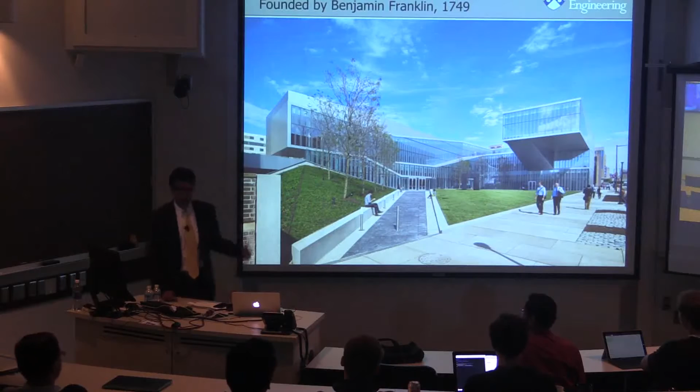Before I get started, I became the dean roughly 3 months ago, and according to the new dean, everybody should have this first slide on their presentation. So this is a picture of our new nanotech building, and I thought I would present this to give you some sense of the composition of Penn Engineering. It's the first engineering school established in the first university, due to Ben Franklin in 1749. Our faculty is roughly 116, about 14 practice professors, research professors, and full-time lecturers. The computer science department is about 30 faculty, roughly the same size as UNC. The great thing is we're planning to grow by about 33% in the next 5 years, so for those of you looking for academic positions, it's a great place to apply.

It's right in the middle of the city, a very rich and vibrant campus, and I'd love to tell you more if you're interested. But what I'm really here for is not to sell Penn, but instead talk about my own work, which is on aerial robot swarms.

I thought I would start by showing you a picture of our aerial robots. And I hope nobody here is from the FAA. If you are, I'll tell you that this picture was shot in South America. If not, this is the Penn campus, and this is the other side of the Penn campus. I'll tell you a little bit about our work.

But first, I want to give you a quick overview of the industry associated with aerial robots or UAVs, and then tell you about how we think about controlling these UAVs. It's a model-based approach, and I want to tell you about this because not only do we design software, but also the electromechanical system that comprises the platform. Then I'll tell you about one of the big challenges in designing good systems at this level: state estimation, the problem of determining the position and velocity of the UAV. Then cooperative control, how we get multiple vehicles to collaborate, and then some of the applications we're trying to address, spending roughly 10 minutes on each idea.

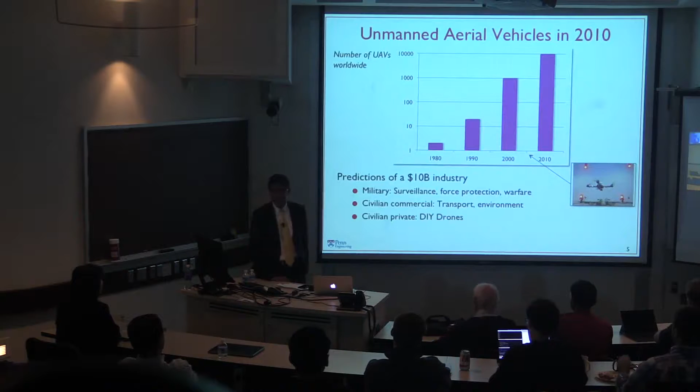At that time, there were predictions of a $10 billion industry with lots of interesting military and civilian applications, primarily driven by the DIY Drones organization. If you go to DIYdrones.com, started by Chris Anderson, who was then with Wired magazine, it attracted about 1 million or so developers by 2010.

And the FAA boldly predicted that this industry is going to take off — we're going to have 15,000 civilian drones by 2020. By the way, we started working with these quadrotor geometries back in 2006, long before they became popular. But before that, much of this work was really in fixed-wing aircraft. So this is in 2010.

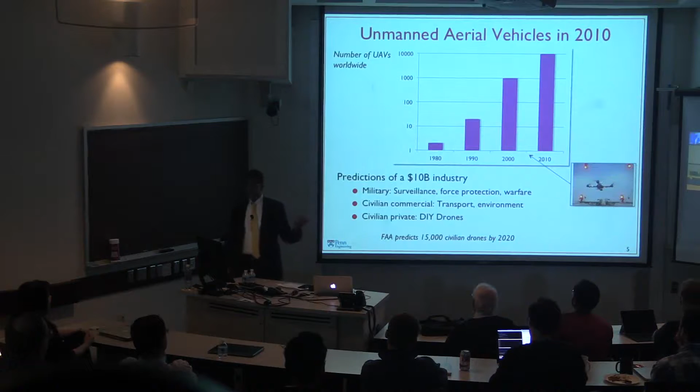Fast forward to 2015, and things have really gone crazy. There's a lot of popular press about this, everybody is talking about drones. They said 15,000 by 2020 — well, 15,000 drones are sold just in the US every month. And this Christmas they expect to ship 1 million drones worldwide in December alone. So this has really become a huge industry.

And now it's a $15 billion industry. They say it's going to grow to $25 billion by 2020, and you know that prediction is also going to be off. But what's impressive now is the broad range of industries being impacted: agriculture, inspection, patrol, security, photography, virtual tourism, movies.

Things are exploding, as you can see. And it's not just these multi-rotor aircraft. If you look at unmanned vehicles broadly, we call these aerial robots, and the industry calls them drones, but it also includes military vehicles — in the Army, they call them remotely piloted vehicles, RPVs. But they're all part of the same family.

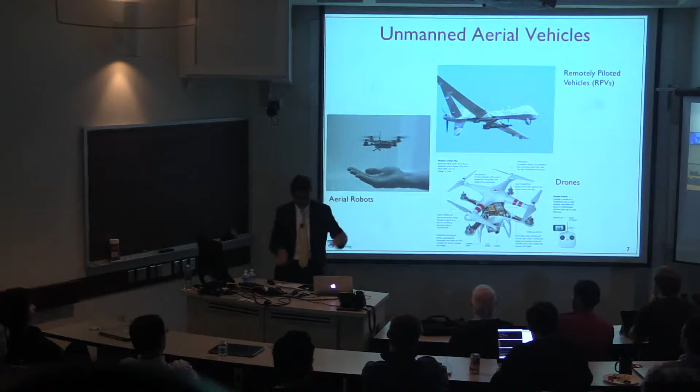There's a lot of growth in small vehicles, research platforms, commercial vehicles, and also much larger vehicles. I like to joke that if you look at the evolution of these platforms, we're actually just starting off — there's a long way to go, and a lot of interesting stuff going on.

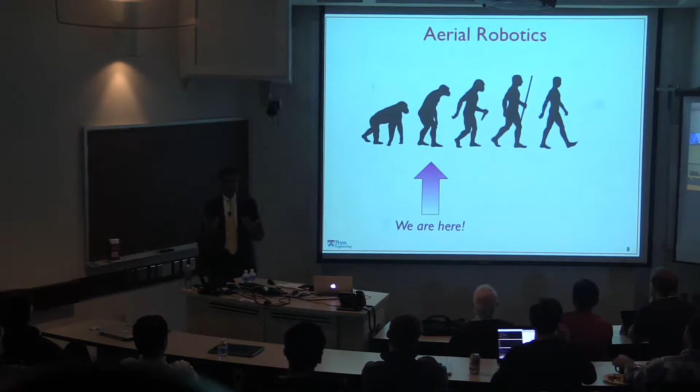So you can ask, why did all of this really take off? And of course, it goes all back to Moore's law. It started with the semiconductor industry, the price-performance ratio of things connected with computing falling. Today people will tell you that Moore's law is actually coming to an end — this is 'Moore's curse,' people argue the Moore's party is over and things are slowing down. But I think there's an after party.

This after party has to do with continuing trends. Computing costs going down roughly 30% a year, same with storage, same with communication. So if you can compute quickly, you can store data, and you can communicate. There's one other thing I don't have here, which is the sensor story — the price hasn't decreased 30% a year, but it's getting there. With cameras certainly it's gotten there, and more. But with the sensors we need for aerial vehicles, it's probably not at the same rate. Still, it's dropping dramatically. So that's one side of the story.

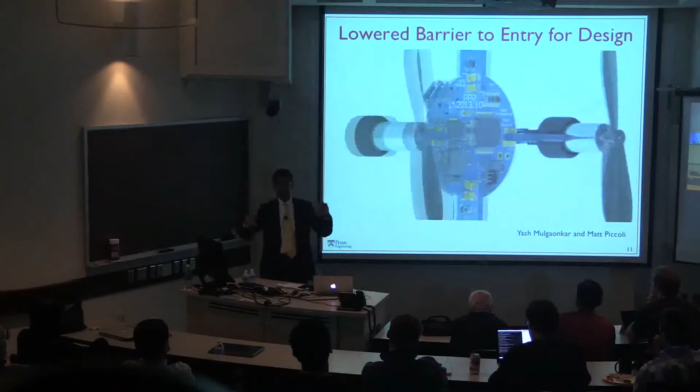I think the second side of the story is that the entry barrier is dropping. For instance, today my students are able to do electromechanical design in a matter of a couple of hours. They come up with modular designs of where to put microcontrollers, how to do power management, how to do processors, where to put the sensors — these smartphone-like designs. I call it a smartphone because it's roughly the same aspect ratio, roughly the same weight.

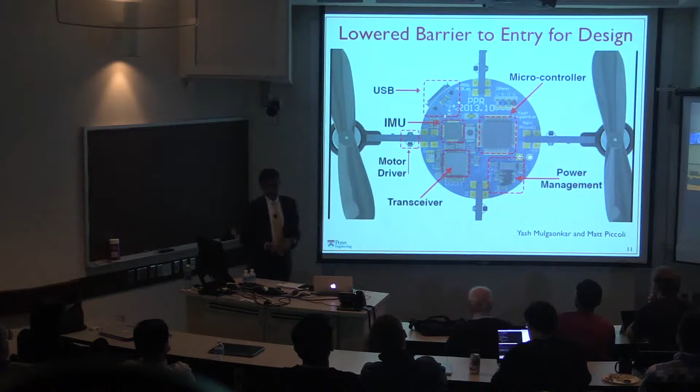You can put these together relatively quickly, and if you have a fab shop, you can manufacture them the same way you would manufacture smartphones today. So the barrier to entry to this field is dropping dramatically.

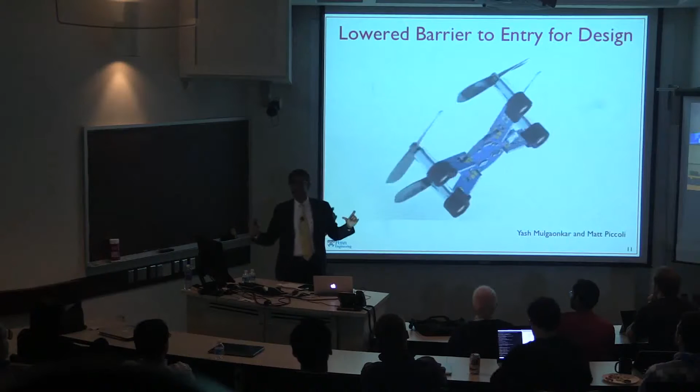And only last Friday, the FAA came up with rules saying that now anybody who owns drones will have to register them. We have literally hundreds of these in our lab, and I'm just trying to think of how we're going to line up to register these with the FAA. It makes no sense, but the point is that the barrier to make these is dropping dramatically. It's not like you have to buy them.

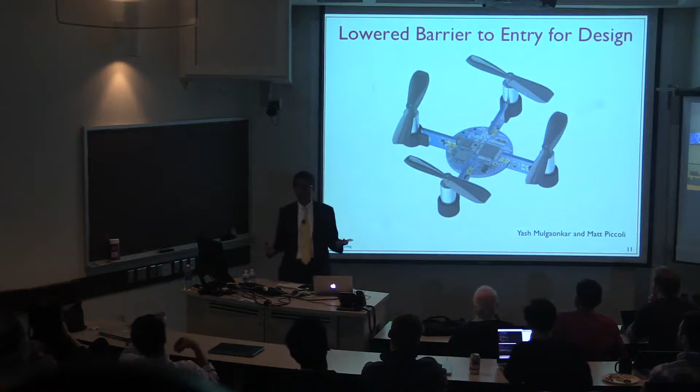So that's the UAV industry. What I'd like to tell you a little bit about is not how we build these, but instead the software that sits on top of these platforms, which is where the value added really is.

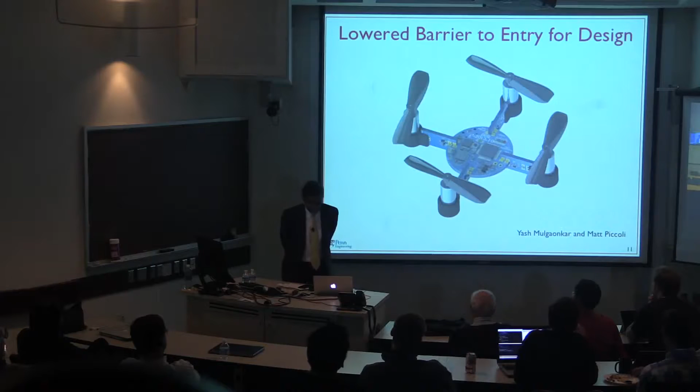Let me tell you a little bit about why it's hard to control these if you want to do aggressive maneuvering, high precision maneuvering, and then how we solve this problem. Most of our approaches are based on models, and then a little bit of learning that wraps around the models to account for uncertainty.

At a very basic level, you're trying to control a 4-rotor platform, and you want to control position and orientation, which means you're looking at the 3 variables that describe spatial position and the 3 variables that describe orientation. You can use quaternions, but in fact we use rotation matrices. Essentially, you're controlling 6 things.

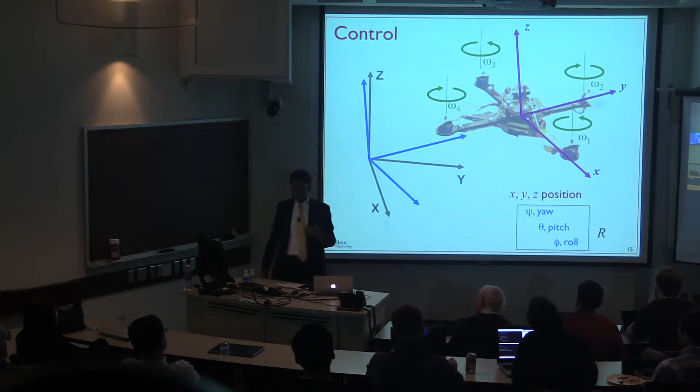And the big challenge is you only have 4 inputs. So the system fundamentally is underactuated. That's really our first challenge.

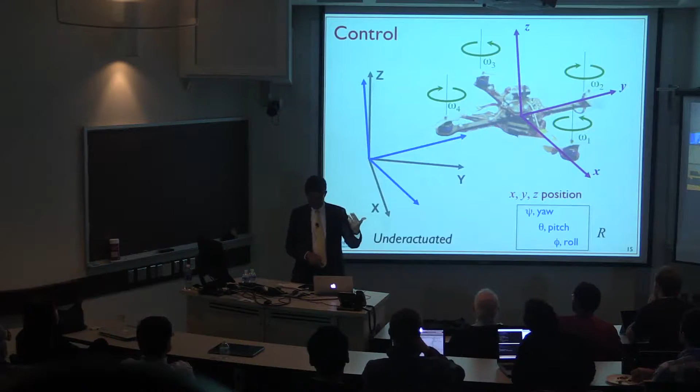But fortunately, there are some attractive properties to the geometry and to the dynamics. This property is called differential flatness. Because of this, while you might want to control these 12 state variables - 6 positions and orientations and their derivatives - which sit on a manifold that's curved and ugly, it turns out that because of the properties of the system, you can actually describe it on a simpler submanifold, which is just the position and the yaw angle.

And this manifold is actually almost flat. It's flat if you consider the Euclidean space XYZ. If you take the yaw angle and pretend that it's not 360 degrees, but instead goes from 0 to 359.9, then you can flatten it out, and that's this flat space.

So it turns out that every trajectory you can think of that sits on this complicated manifold and satisfies the laws of dynamics can be modeled by a sufficiently smooth trajectory on the left-hand side, which means the problem of planning dynamically feasible trajectories reduces to a problem of computational geometry. Find something that's sufficiently smooth, and you're guaranteed you should be able to follow it. So that's one simplification.

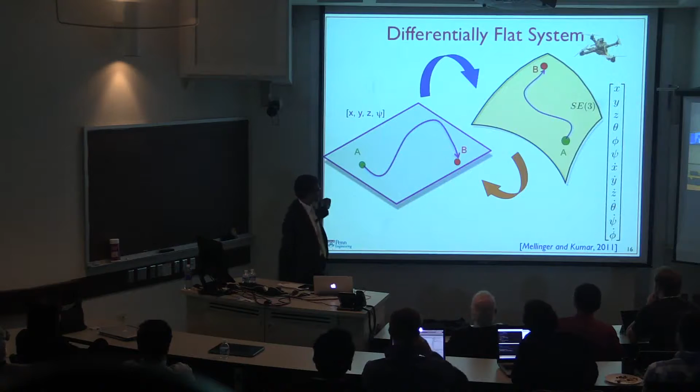So if I want to go from A to B in this more complex space, all I have to do is find the corresponding points on the left side and then plan the smooth trajectory on the left side. Our planning problem really is to find time-parameterized trajectories in position, Cartesian product with the yaw angle, which is SO2. Once you have that, we can think about control.

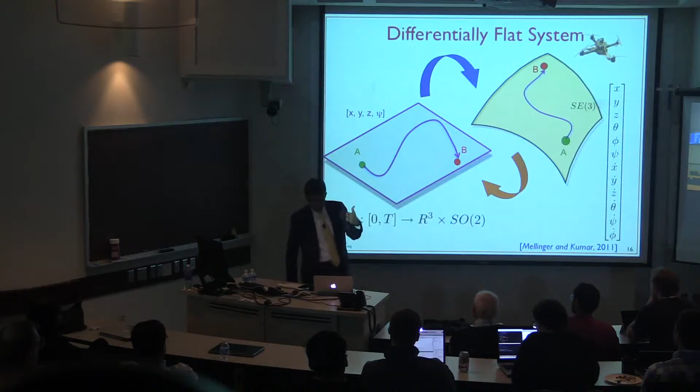So you do the next best thing: you project t along the direction in which you can apply the forces. That's just a dot product, right? So it's going to get me roughly what I want, but not quite, because the two vectors are not aligned. What's the next thing I can do?

Well, I can rotate the platform so that the vector k points along t, which means I have to essentially roll or pitch the vehicle so that those two vectors become aligned. And that's the second piece.

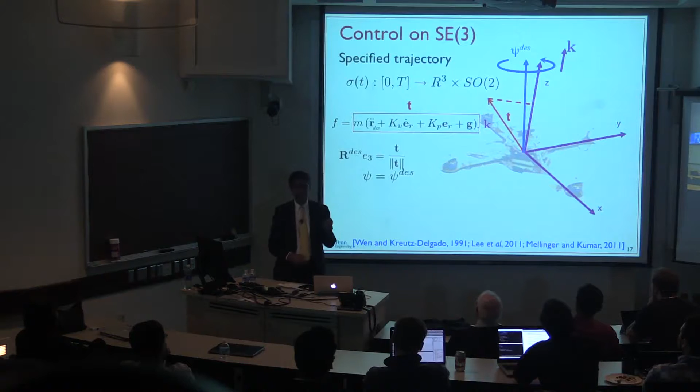We figured out what that orientation is, so we calculate the desired rotation, r desired, and then we calculate the error in rotation space. This is a little complicated. You have two rotations—how do you find the error between those two rotations? You have to do the computation correctly on SO3.

But if you can do that, the rest is just proportional plus derivative control on SO3. The only thing that complicates this is all the nonlinearities. If you know how to handle that, and if you're a control theorist, this is all pretty standard—and we know how to do that. That gives you the total force and total moment you want to apply, which translates directly into the rotor speeds. So all of this happens at 100 to 200 times a second on board the vehicle, and that's the essence of control.

The other thing we do, besides writing down these equations and implementing this in software, is get an understanding of what these terms are. You'll notice one of the things that shows up here is I—the inertia tensor, how heavy the system is and how distributed the mass is. The more the distribution, the bigger the rotary inertia, and that comes into play in these equations.

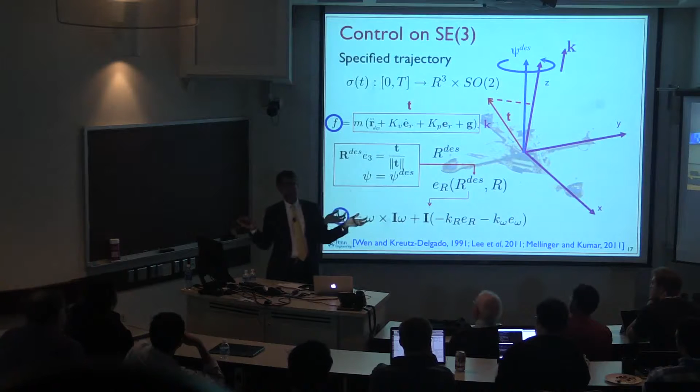It turns out that your ability to quickly stabilize degrades with the inertia—the bigger the inertia, the harder it is to stabilize the system. This motivated us to build smaller vehicles. This is work by Yash Mulgaonkar. This is an 11 centimeter vehicle.

From micro aerial vehicles, we've gone to nano, and now we're down to pico. This consumes about 6.5 watts, max speed of 6 meters per second, which is about 3 times brisk walking speed. But 6 meters a second normalized to 11 centimeters, in terms of body lengths per second, that's pretty fast—like a 747 going at Mach 50 or something. So this thing could really zip for its size.

Again, the small size has added advantages—it becomes safer. You can stick your finger in the blades and nothing happens to your fingers, which is important. When we first started working on this, one of the first things we had to order was a first aid kit. Now if I plot this histogram of Band-Aids consumed over the years, it's kind of tailed off with this guy.

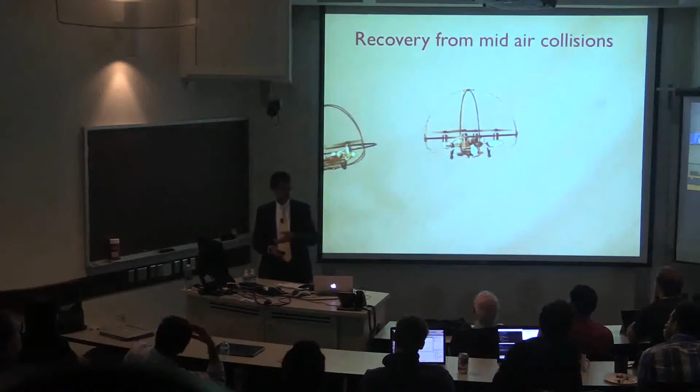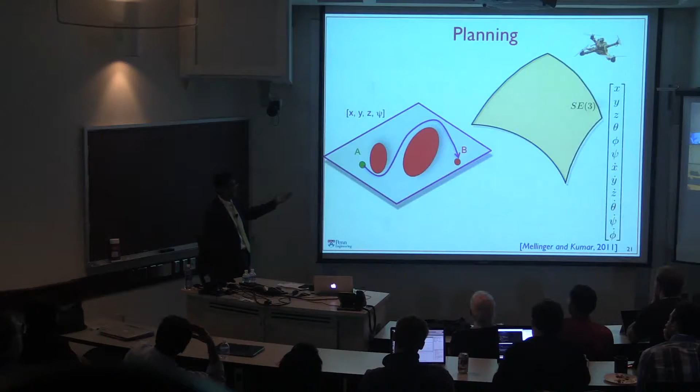Coming back to planning motions, as I told you before, we think about planning in the space around obstacles. Someday we hope not to worry about the obstacles, but right now we do because our vehicles are a little bigger. We plan these smooth trajectories, designed to minimize the fourth derivative of position, so we call them minimum snap trajectories.

Again, this is a computational geometry problem. If you know what the obstacles are, you can plan your trajectories around them, and those trajectories get automatically mapped to this more complex space. I told you the control story, but this is the net amount of real-time software that has to run for control and planning on board. Of course, I have to know where these obstacles are, and that comes later, but the control and planning is essentially this.

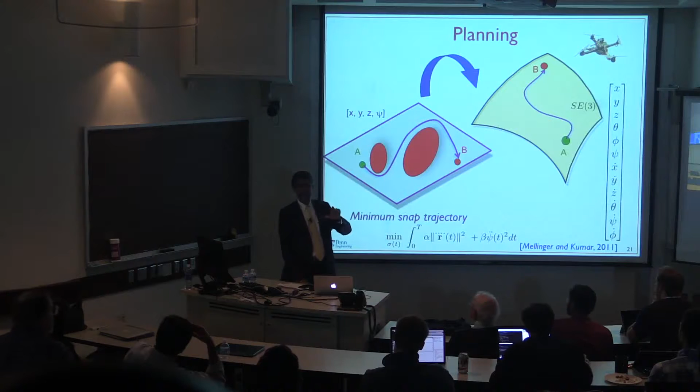One of the things I want to emphasize is that we can't really decouple the mechanical design from the electrical design from the controls design. As you'll see from this video, this is Daniel Mellinger's work, and this is Yash Mulgaonkar's work. Bigger robot, smaller robot, same degree of robustness.

One of the things we can show you is that if you look at the basin of attraction, roughly speaking the envelope of conditions from which you can disturb the robot and have it recover safely, that basin of attraction grows inversely with L, actually L to the power 5/2. So the smaller you make L, the bigger that basin of attraction, and the more violently you can disturb it. This is sort of paradoxical, because you think about flying and say, well, I want to be in the biggest aircraft possible. Actually, the smaller aircraft are more robust if you think about recovering from really large perturbations.

So that's one of the reasons we think about co-designing the mechanical platform and the control system design. If you take systems like this — and by the way, all of this is being done indoors in a motion capture camera environment where we get position feedback at 100 to 200 hertz — then the only real challenge is designing software for control and planning.

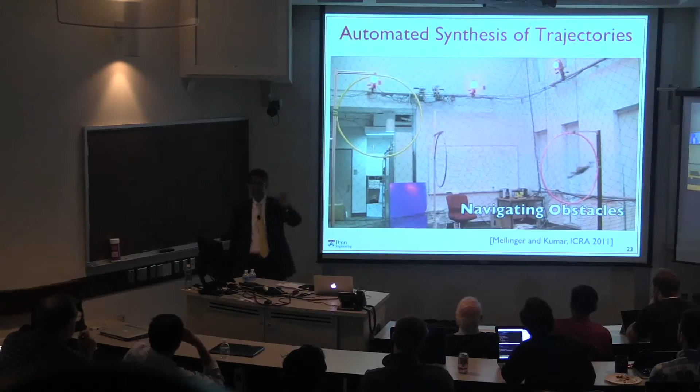And these are some of our minimum snap trajectories. If you know the environment and place these obstacles, and the robot knows what the obstacles are, it can generate trajectories like this in a fraction of a second. And it doesn't matter if the obstacles are moving — as long as it knows where the obstacles are, it can calculate these trajectories.

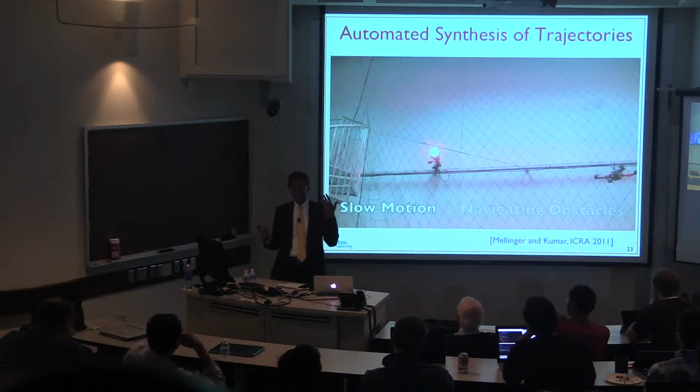So here again, the computation takes about roughly 1/40th of a second, and the vehicle sees the hoop, maybe 2 snapshots, extrapolates it as a function of time based on its knowledge of Newton's laws, and it's able to execute that. So in all of this, the only unknown thing is really the dynamics due to wind effects and near-ground effects, and those you have to learn over time. So we run a simple filter whose parameters we estimate over time.

And there are a few other things you have to do for maneuvers like this, which I'll tell you in a minute. This is Justin Thomas's work and Koushil Sreenath, who's at Carnegie Mellon. Birds are able to coordinate flight with manipulation, and this is our attempt to do the same thing. This is a Philadelphia cheesesteak.

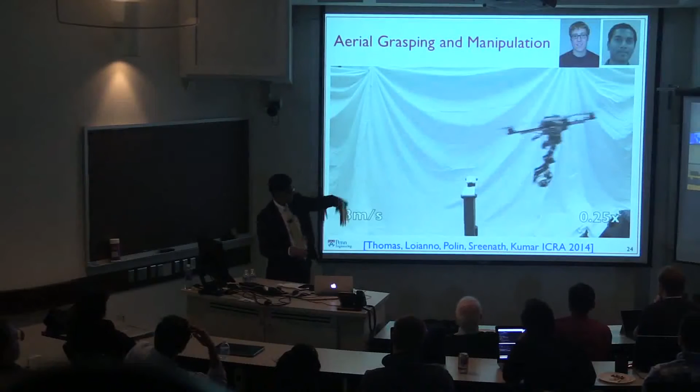You could see — by the way, it's the same framework — but the challenge here is as the vehicle swings its arm back, because of angular momentum constraints, the vehicle actually pitches forward the other way. So that has to be planned. Again, there's a combination of model-based methods, but then some iterative learning, which allows you to essentially determine the correct parameters. The first time we tried this, of course, it didn't work. But in 4 or 5 tries, you essentially get everything correct, and that's where the learning comes in. But there's a strong model-based component.

And the same model-based component — this is Sarah Tang's work — you'll see her trying to determine the exact trajectory that's required to carry this payload through a window that's a little shorter than the height of the payload. Again, if you have a model, you can essentially fine-tune a few parameters to do this, and the learning again is based on a known structure.

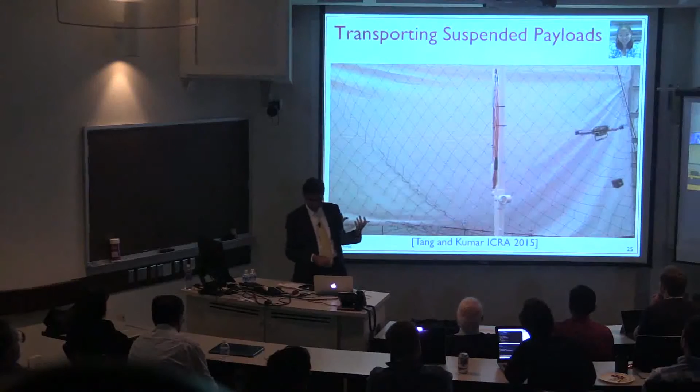Releasing itself from the perched position is actually harder. I don't have that experiment here, but it's something we've learned how to do, because when you release, it releases unevenly, and you have to recover from a bad set of initial conditions. This is something we've been working on with his group, to allow vehicles to perch on different types of surfaces.

So this gives you some idea of our approach to planning and control. What I want to do next is talk a little bit about state estimation.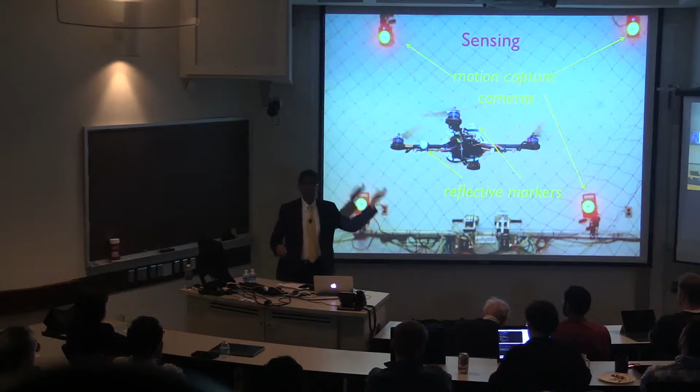So this is great for doing everything I've shown you, but if you go into buildings like this, you have to do this on board. Nobody's going to set up a camera system for you, and in fact in this building you can't even get Wi-Fi to work. So this is a big problem.

So we've built a whole set of vehicles. This is maybe a 4th prototype, a 2014 prototype, which essentially tries to do this on board. The solution is to put cameras on board - you'll see a stereo pair, a GPS receiver for when GPS is available, a downward-facing camera which you can't see, a pressure altimeter for measuring height, and of course an IMU.

So with vehicles like this, you essentially try to use some variant of what is known in the robotics community as SLAM - simultaneous localization and mapping, or structure from motion, for those of you in the computer vision community.

I know you're probably all aware of this, but let me give you a very quick overview. The fundamental idea is you have a robot that doesn't know where it is. There's a whole bunch of features waiting to be detected. If it's a range sensor, it's probably reflections from features in the environment like doors, pillars, walls, etc. If you have a camera, it's probably features you detect in terms of changes in intensity, corners, and so on. Depending on where you are, you see a subset of these features, possibly overlapping, could be disjoint.

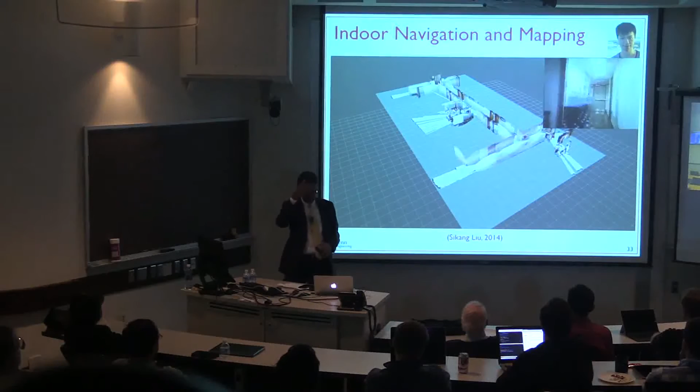To show you the kinds of maps we can build, here's an example from Sikang Liu's work, showing how we use onboard sensors to build maps indoors using a combination of laser scanners and Kinect RGBD cameras. This is our lab, entering on the bottom. You can see the clutter here, must be our lab.

These are 5 centimeter resolution maps, and you can see the trajectories it estimates. All of this can be presented to someone who isn't there, and that person can click their way through this complicated scene. This particular trajectory was pre-programmed, but you could imagine doing this interactively. This is the indoor situation, where we use sensors capable of dense mapping, like RGBD sensors, in real time onboard the robot.

Outdoors, things become a little more complicated. I want to show you Shaojie Shen's work, combining indoor and outdoor navigation. Again, the same idea: the user clicks on points and the robot moves. What you see here is a combination of lasers, and this is the error ellipsoid calculated using the UKF. It's scaled up by a factor of 100, and the color tells you which sensor is being used - for example, yellow means GPS and vision.

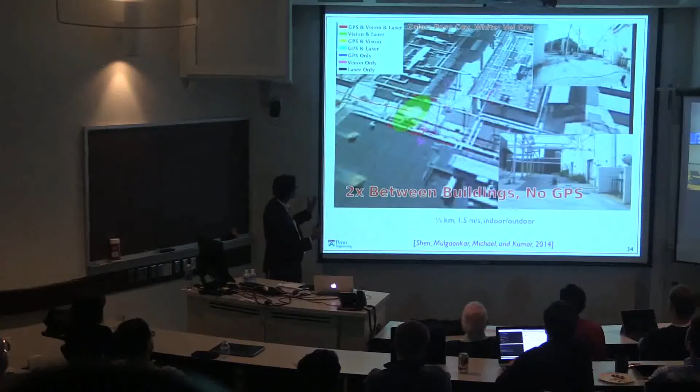When it goes through the trees, there's no GPS, only vision and laser work. Between buildings, GPS clearly doesn't work because you're too close to the walls. In a minute you'll see it go indoors where it's dark, and only the laser works. Of course, in all of these, the altimeter and IMU work. The key contribution is that we're able to integrate information from these different sensors and operate in a variety of settings.

The couple of things we still don't know how to deal with: one is smoke, and the other is being surrounded by a glass cage - I'd argue even birds have a hard time flying near glass buildings and windows. Those are two things that are currently hard to handle with this sensor suite.

Think about the challenges Amazon faces with package delivery. Going from point A to point B in the sky at 400 feet isn't challenging. The minute you come close to man-made features like buildings, or close to trees, bad things start happening. You can't have a map for everything unless you cut down all the trees and prevent humans or cars from entering an area. And even then, near buildings you might not have GPS.

And even then, you might have to worry about somebody trying to take this thing down with a baseball. So there are all these other things we have to worry about, and this is our attempt to navigate close to physical structures in the presence - and possibly the absence - of GPS, which eventually we have to solve for autonomous aerial vehicles.

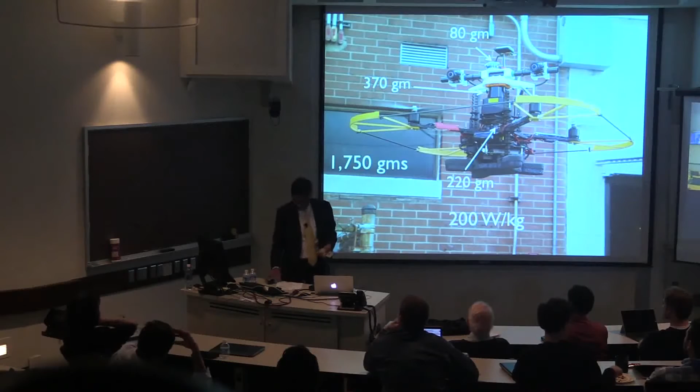So this is 1,750 grams. We started asking ourselves, is it possible to come up with a smaller platform, something inexpensive, lightweight, something that has sensing and computing in a smaller package? Well, obviously, each one of us has this, right? It's your phone. And that was the genesis of what we call the Flone.

So you take an off-the-shelf vehicle. This is not off-the-shelf, this is ours. This is an off-the-shelf Samsung Galaxy smartphone, in collaboration with Qualcomm. We use this Snapdragon processor and the suite that comes with it. And you find the lightest USB cable, a really short one, to plug into our vehicle.

Everything that the robot does is actually done on the phone, including sensing the environment with the onboard camera in the back, which you take pictures with, and is actually a pretty nice high-resolution camera. You'll see the same kind of minimum snap trajectories I showed you being executed on this phone, or the Flone, at 3 meters per second. That's moving pretty quickly, and you can see the roll and pitch angles are quite significant.

So this vehicle is not only able to do all this, but also estimate the ground effects. Ground effects have to do with when you come close to the ground, you get a push off from the ground because of the downwash from the rotors. When you go close to a wall, you get sucked into the wall. When you go into the ceiling too, it's the opposite of the ground effect, so you get sucked into the ceiling. Something we found out the hard way, by the way.

The vehicle actually estimates all of this because it's doing visual odometry. It correlates what it sees, what forces or rotor speeds it's commanding, and then what motions it's achieving, and then it backs off the ground and wall effects and compensates for that.

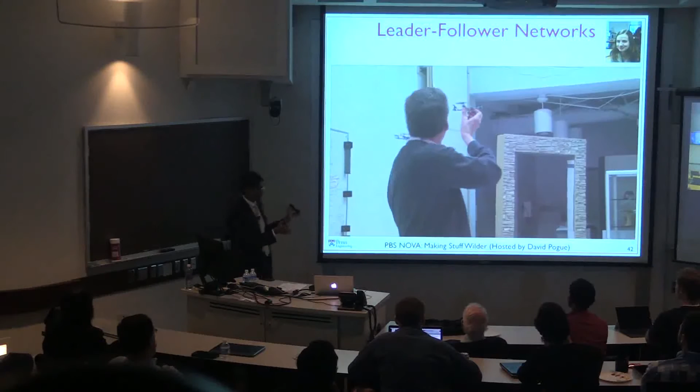He literally hijacked one of the aerial vehicles and is moving it around, and the other vehicles that are communicating with it, trying to maintain relative position and bearing, don't care that vehicle is manually driven. Everything is done in an automated way, so he's able single-handedly to manipulate this small group simply by taking possession of the leader.

So if you had multiple leaders, you would have a little bit of conflict between what one leader wanted to do and what the other leader wanted to do. But essentially, with a couple of leaders, you could control a very large team.

The second paradigm is this notion of anonymity, having robots that are unlabeled. This is Matt Turpin's PhD work. This notional experiment illustrates a small team forming a circular pattern on the fly, with robots that don't know who their neighbors are. In fact, they don't even know how many robots are in the team.

So they automatically move into formation or out of it based on how many vehicles there are. For the same size circle, if there are many vehicles, they'll spread out; if there are fewer, they'll cluster in. That happens naturally in this framework.

Once you have that, you can think about how to achieve very large shapes and how to move them around. Again, this is Matt's work. They start off from a circular formation, deform into an elliptical formation, stretch into a straight line, then back into a circle. All of these formations are specified at the level of equations.

You specify 3-dimensional curves, and the vehicles will fall into those curves. If those curves are time parameterized and change, the vehicles essentially follow that. So these are some of the things we can do using our methodology.

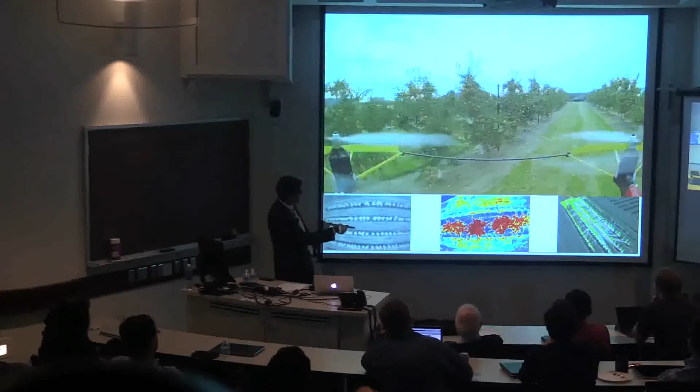They're able to gather images from the air, which this is infrared imagery. This is 3D map information, much like I showed you navigating indoors. This is the same thing, but you're able to measure the size of every tree, how big the canopy is, where the fruits are, and then monitor that as a function of time.

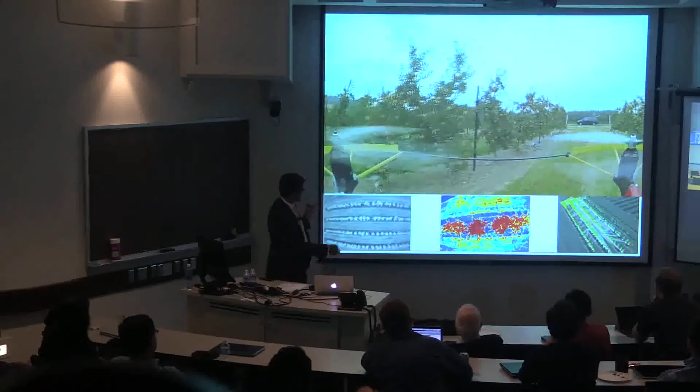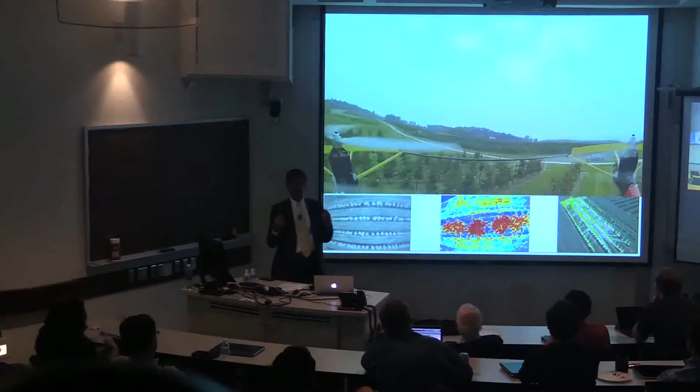And this is the measurement of an index called the NDVI. Again, these two are taken from the air, and NDVI tells you something about the vigor of each plant. So just like in personalized medicine, every person is treated differently. Here we're thinking about how to treat every plant differently.

And again, you have multiple vehicles do this because you want to cover large areas in a very short amount of time. So we think approaches like this can really increase the yield of fruits in orchards like this. More importantly, it'll decrease water consumption. Agriculture uses 80% of today's water. So if water is a problem, you first have to tackle the agriculture problem. And that's what we're trying to work on.

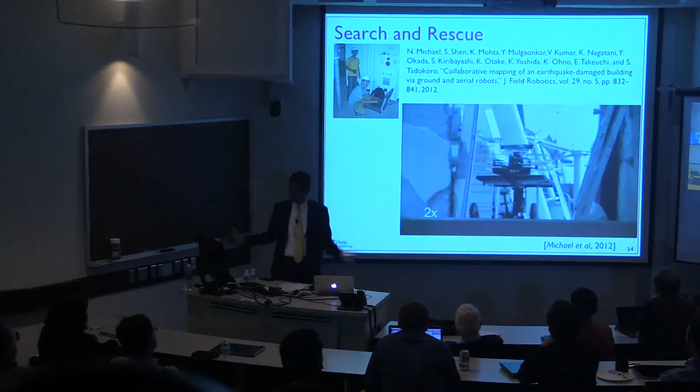And again, the reason we wanted our robot to hitch a ride is because it's always short of energy. So it's programmed to be lazy. So whenever possible, it hitches a ride. But you could see in front of this collapsed doorway, when it gets stuck, the ground robot releases the aerial robot, and it's able to go through this. This is sped up by a factor of 2, and it's creating these maps.

Let me skip through this and instead show you the kinds of maps we can build. So this is a map we built of the electrical engineering building at Tohoku University shortly after the March 2011 earthquake. Collapsed building, 3 floors, and these were essentially to build maps to verify structural integrity. There were no victims here. This happened 2 months after the earthquake. But we were able to develop these maps and get reasonably high resolution maps without human intervention.

Of course, this took 2.5 hours, so it's not really a practical tool. No first responder is going to give you 2.5 hours to let your robots do their thing, right? They'll probably give you 2.5 minutes if you're lucky, maybe 2.5 seconds. So that's where this notion of swarms comes in. We really want the vehicles to go and fly in, collect all this information, and think about efficient ways of integrating this information.

I've seen a lot of work being done here on 3D reconstruction, and we should be able to do this from robots that are not particularly well localized, but have some information about where they are and where they took the pictures from. Then you could build a 3D reconstruction in a fraction of the time using cloud computing, parallel architectures, and all kinds of fancy computational tools.

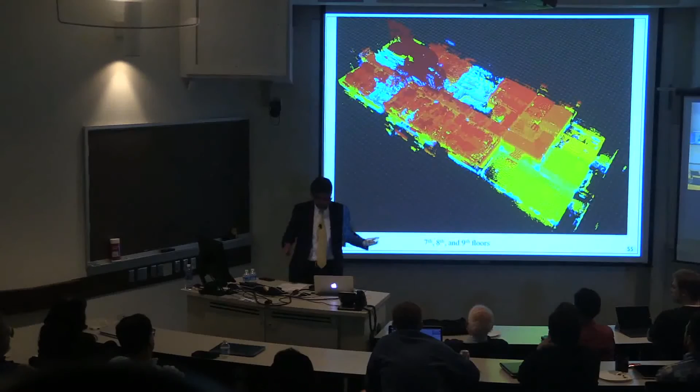So that's really all I wanted to say. I just wanted to point out there are a few things in this field we should really be thinking about. First, it's really easy to get into this field because of the democratization of science and technology. This is a great opportunity for us, but it's also a threat because obviously people can do bad things with it. There's a problem with asymmetric threats.

I can develop a swarm for doing useful things. It's also possible to develop swarms for doing bad things. In fact, it's much easier to develop swarms to do bad things. Leslie Kaelbling used to say it's very easy to write bad programs, and that's true. It's very hard to write good programs, provably safe ones.

I think safety is a big issue. The FAA is worried about this. Cybersecurity—we think about hacking into networks, hacking into swarms of machines. That's an order of magnitude worse. And then there are issues of privacy, but I put this at the bottom of my list. Do we really care about privacy because of drones when all of us probably have embarrassing pictures of us on the internet that we don't even know about? So yes, privacy is important, but that, for me personally, is the least of my concerns.